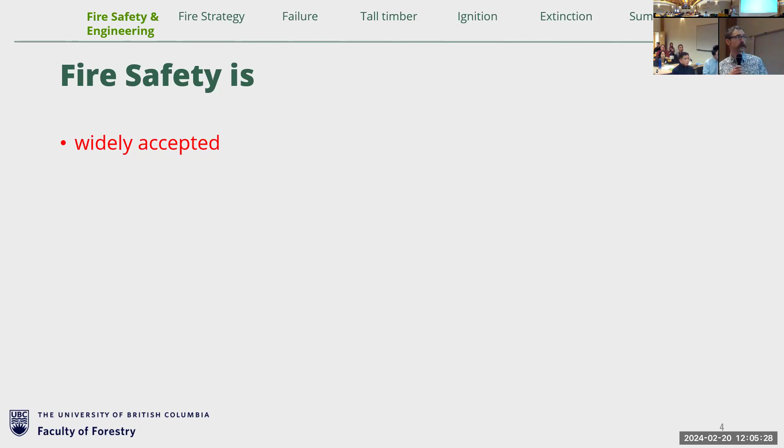And yet fire safety has been part of a major conspiracy theory. I'm sure you've heard about this when you think about 9/11 and the collapse of the World Trade Centers. There was this conspiracy theory that jet fuel can't melt steel beams. The theory was based on the fact that the flame temperature of kerosene is about 1,000 degrees Celsius, and the melting temperature of steel is higher than that. So the argument was that the fires from the fuel in the planes could not have burned hot enough to melt the structure. And yet we saw the buildings collapse.

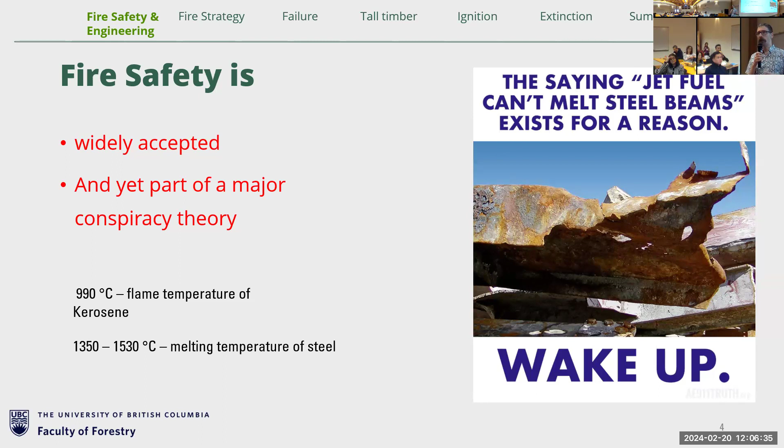That was a popular theory in the noughties. But I actually found this post on Facebook from just 2 years ago, so it's still going around. It's persistent. Hopefully I don't have to tell you it's nonsense - we'll get into why that is later. But it shows that while fire safety is widely accepted, it's not widely understood and often misinterpreted in how it actually works.

And fire safety can be restrictive. This is a replica of the City of London from 1666.

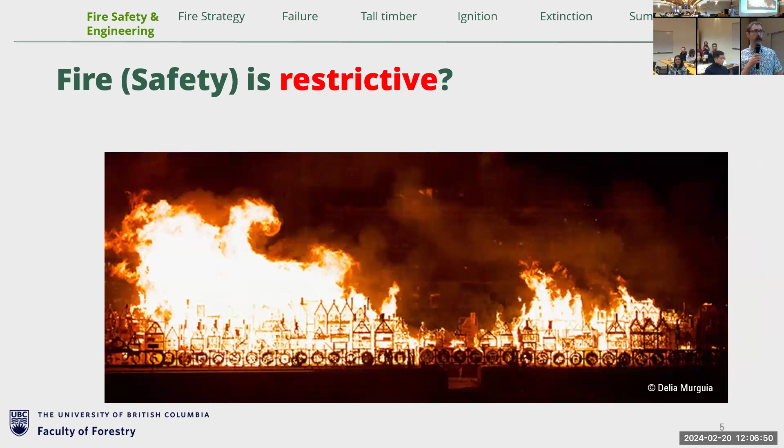And for the 350th anniversary, they rebuilt that and burnt it on a ship in the Thames. Basically, the consequence of that fire was that by royal proclamation of Charles II, you couldn't build with timber anymore. So fire safety restricted the materials we could use.

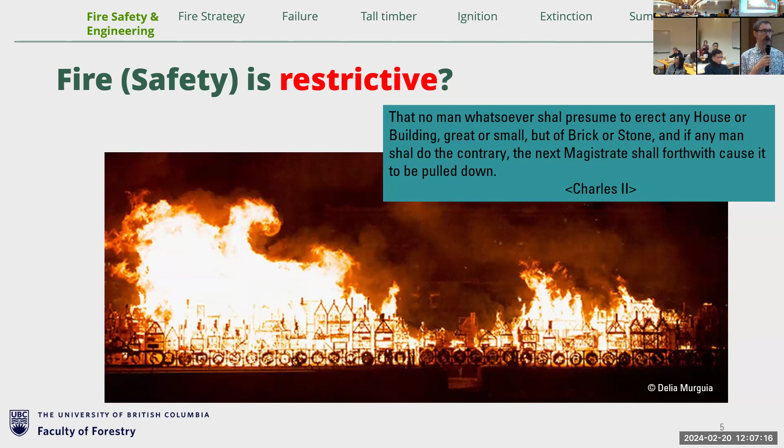Obviously, with fire safety engineering, we have moved a bit away from that. But fire safety is often seen as restrictive if you want to build something, if you introduce novel technology into buildings. And because it's restrictive, it's tightly regulated, or because it's tightly regulated, it's restrictive.

But often these regulations are not well quantified. And the reason is we don't see a lot of catastrophic fires. And because fires are relatively rare events, that means often flaws in fire safety make it into the building stock and are not discovered until a fire actually breaks out.

And actually what that means is, it can be quite frustrating that fire safety is restrictive because I work with a lot of amazing colleagues in wood science. For example, we have guys working with cellulose and lignin, taking wood and making amazing new products out of it. And with fire safety, sometimes it feels that 50% of my job is telling architects what they cannot do. They have great ideas, but sorry, fire safety won't allow that.

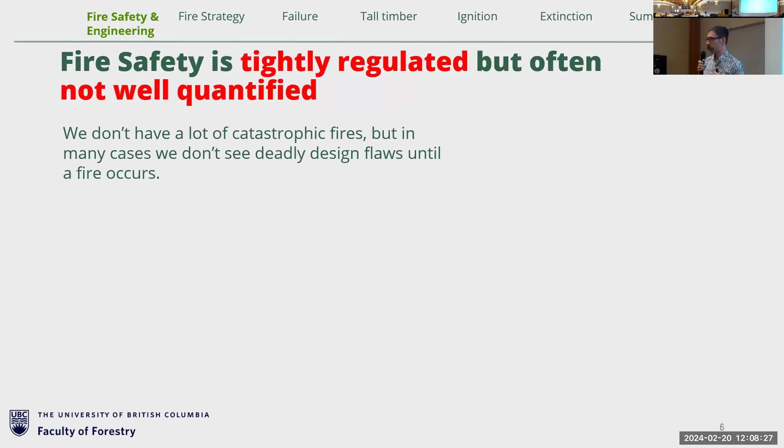The other thing that means, because it's not well quantified, is I can always say in grant applications: well, maybe there's something that you haven't considered. You need to pay me research money so that I can find out what you haven't discovered.

Actually, Kathleen Almand from the Fire Protection Research Foundation, who also worked at NIST, kind of summed it up when she said that we do have rare structural fire failures, but when they do happen, usually it's something that could not have been foreseen in standard fire testing.

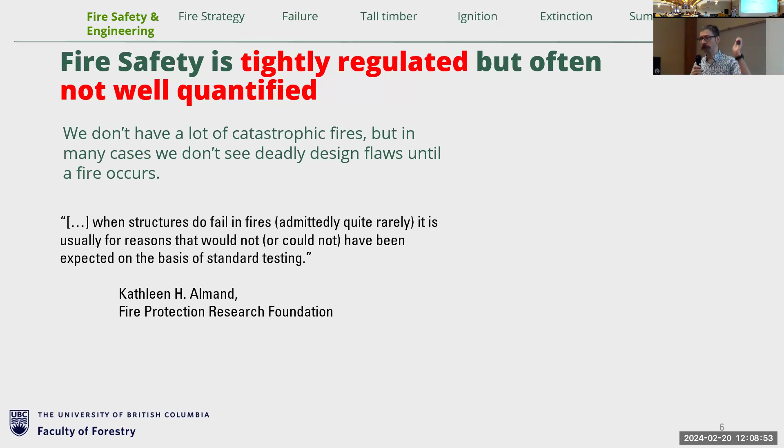And again, I can say that the need for research is there because look at this nice new timber building, would be a shame if something happens to it. Almost like a shakedown. On the other hand, I can always argue that if you don't have a fire event, maybe you're spending too much money on fire safety. So really the key here is to move towards better quantified fire safety. That's one of the things driving research.

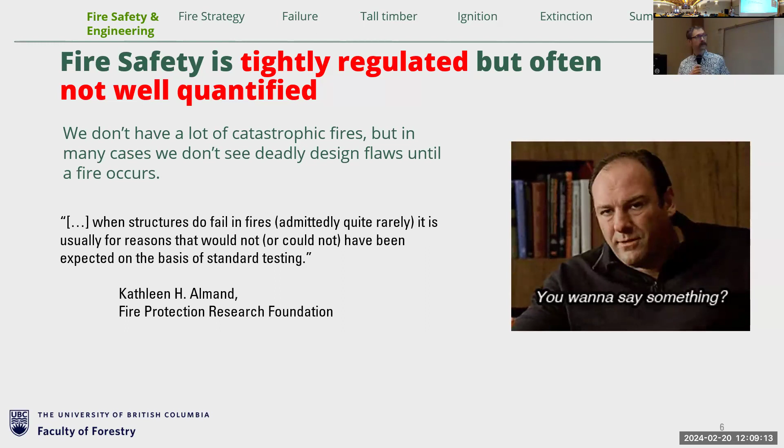At the same time, we said fire safety is restricting, but fire safety engineering can actually be quite enabling. I hope most of you know this building.

It's the Centre Pompidou in Paris. And this would not have been possible without fire safety engineering, because it sits right down in the center of Paris. At the time, the fire resistance rating required for a structure such as this would have been 4 hours. One of the architectural features of this building is that all the structure is located on the outside, visible to the observer. So it's not hidden, it's shown, but you would not be able to put it there with a 4 hour fire resistance requirement.

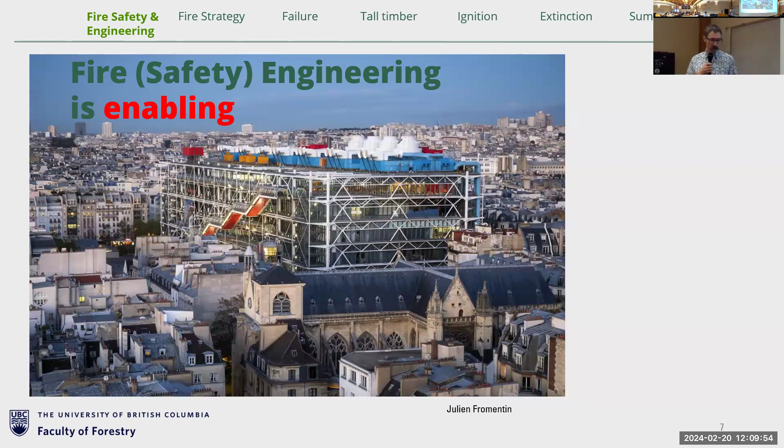Essentially what happened is that Margaret Law, who was a pioneer in fire safety research, at that point worked for Arup, went to the authorities and showed that if we actually look at what the external flame temperatures are, what the heat exposure to these external structures are, we can justify that with these fire safety features, we can build this building despite not achieving 4 hours fire resistance on these external structural elements.

So it's really about doing research. The research shown here is from the 50s, it's her early work on ignition of wood, but she was a pioneer, and she really pushed the envelope of using knowledge and engineering to justify bold architectural visions.

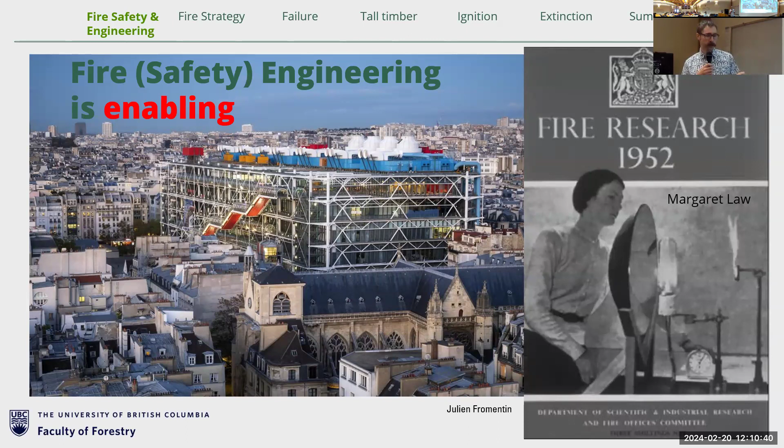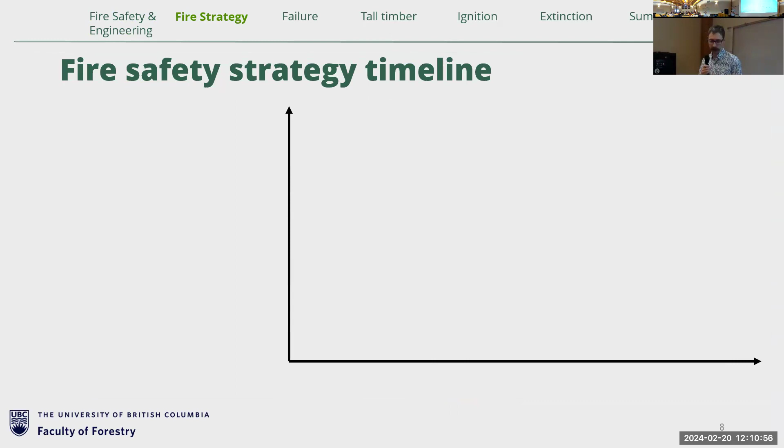And how would that work in terms of how do we apply fire engineering to a building? Well, the fire safety strategy becomes very important. If we look at a timeline, with time on the x-axis, and on the y-axis we have the fire size, the people evacuated, and the structural integrity of the building remaining, a fire might develop like this: initial phase, then rapid growth and more growth, and eventually getting to 100%, or in this graph, even beyond.

Fire safety features could include sprinklers. The first sprinkler can control the fire, giving us a smaller fire to deal with. If that sprinkler doesn't work, maybe the second sprinkler will. If the sprinklers don't work, we have the fire brigade. So all of these create different fire scenarios that we can evaluate.

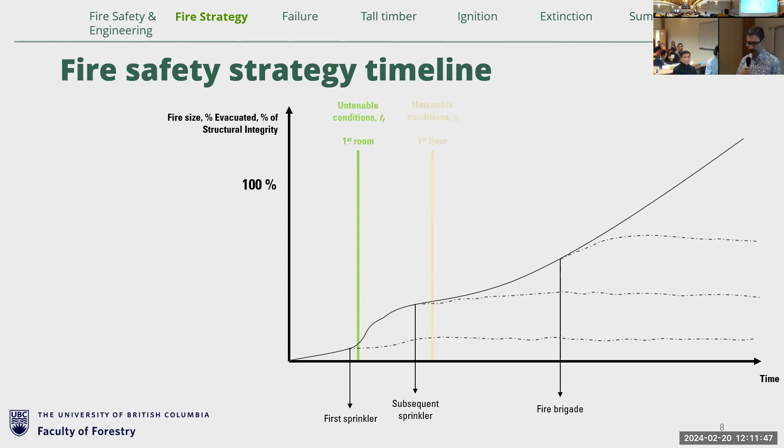Ultimately, when we think about life safety, as the fire develops we'll get untenable conditions in the first room, then untenable conditions on the first floor, and eventually untenable conditions in the whole building, if we don't manage to stop the fire before that.

We need to detect the fire and raise the alarm, giving people the opportunity to escape. First, the people in the first room need to escape before conditions there become untenable. The same principle applies to the floor and ultimately the whole building. If we satisfy all that, everyone gets out safely. And during that escape, we need to maintain the structural integrity of the building.

Eventually, if the fire keeps growing, we may see local collapse and then collapse of the whole building. There are different interpretations. Most building codes and laws say structural collapse can be tolerated as long as everyone gets out and there are no firefighters in the building. But in reality, if you think about a high-rise in the center of Vancouver, you don't really want that building to collapse originating from a fire that started in a toaster somewhere.

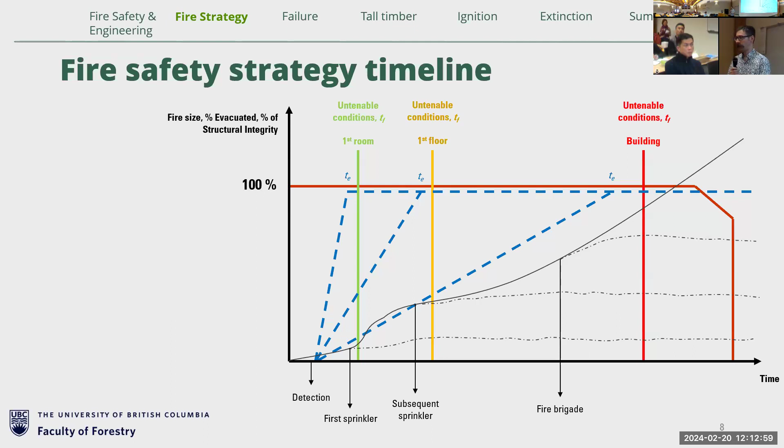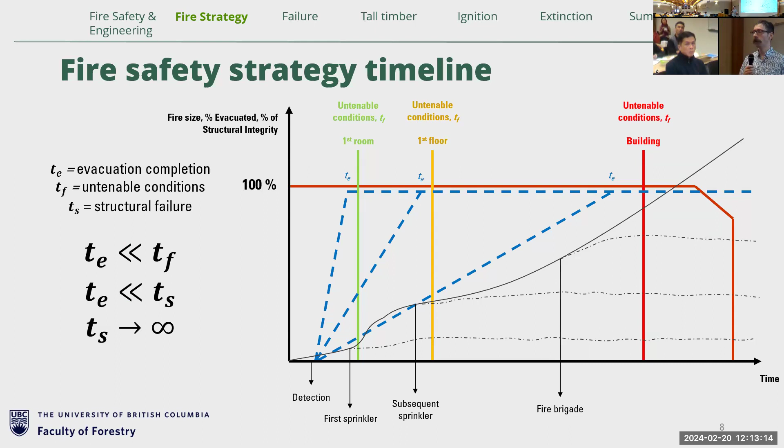It's a disproportionate collapse. So really what we want is our evacuation time to be smaller than the time to reach untenable conditions, and smaller than the time to structural failure. Ideally, we want structural failure to happen never—time to infinity.

I mentioned sprinklers there. Sprinklers are great from a fire safety engineering perspective—statistically they've helped reduce death, injury and damage in a lot of fires. But if sprinklers worked 100% of the time, Stavros should dig out my contract and rip it apart, because then you wouldn't need me—you wouldn't need any fire safety engineering if you could rely on sprinklers 100%. But they don't. They have a failure rate, depending on who you ask, somewhere between 90 and 95% reliability, which is still pretty good, but ideally you cannot rely on it alone.

Sadly, that was shown just a few years ago, and two weeks ago they released a coroner report. There was a fire in an SRO in Vancouver, the sprinklers didn't work, and two of the occupants died. So fire safety relies on sprinklers and a lot of other things: detection, fire resistance, compartmentation, having adequate egress paths—all of these combined, and all of them have a failure rate.

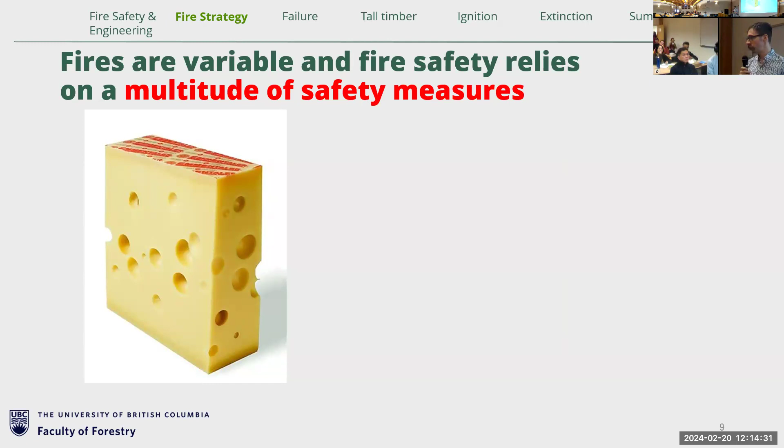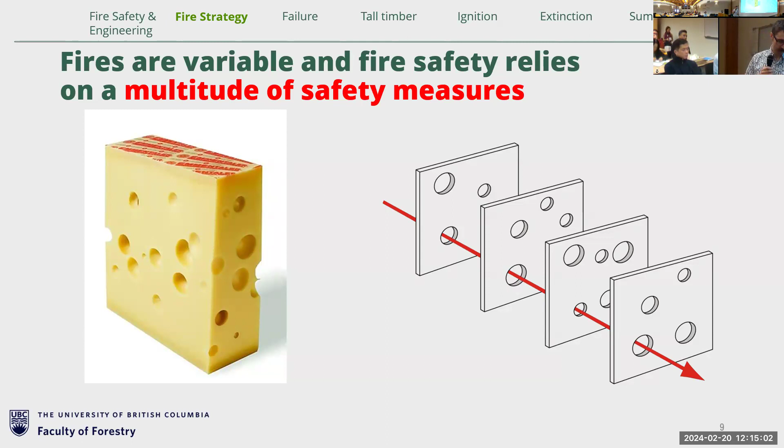The idea then is to apply the Swiss cheese model, which you may have seen during COVID. All of our systems have a point of failure, a probability of failure, but if we make those holes small enough, and layer the cheese so the holes don't align, then overall we get a probability of failure that's acceptable. So the idea is my first line of defense is maybe just the sprinklers—if they fail, all the other systems take care of it. That's the idea, and we'll see why that doesn't always work great.

So how would we look at that from a building point of view, talking about fire safety engineering? If we look at a room like this, a likely ignition source would be the AV equipment here. If the fire starts, hopefully at some point people will realize this isn't just a stupid trick by the guy talking about fire. We have three doors here—I'm only using two in the simulation. Eventually the guy at the front is a bit slow, but everyone gets out, and we can see the smoke descending.

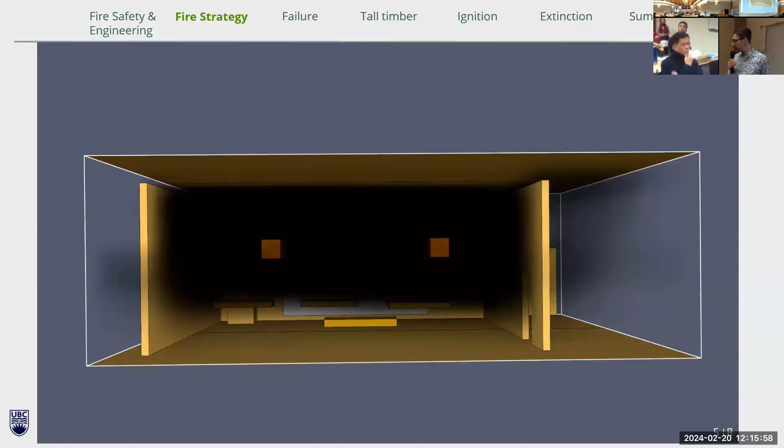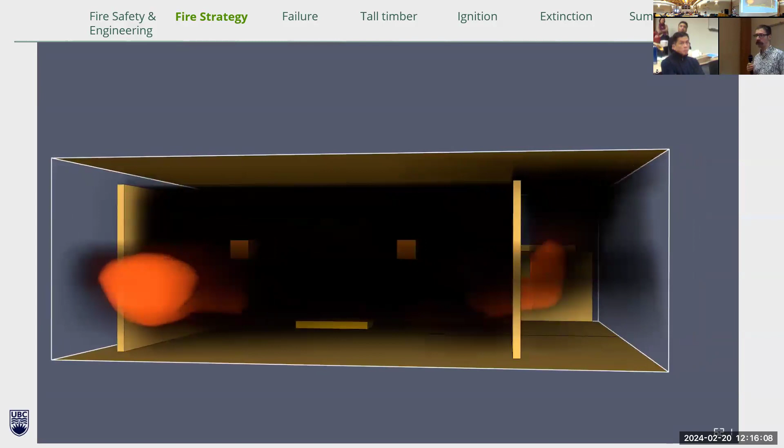In this case, no one was really affected by smoke, so everyone got out before conditions became untenable. If we wait a bit—I did try to simulate the ceiling as well, made of timber—eventually we'll see that timber ceiling ignite. That's happening now, and that means we now have flashover, so everything in this room is burning, and flame can spread outside and through the building.

I made this video to have some nice pictures to show. I didn't want to go too detailed because it can take quite a while.

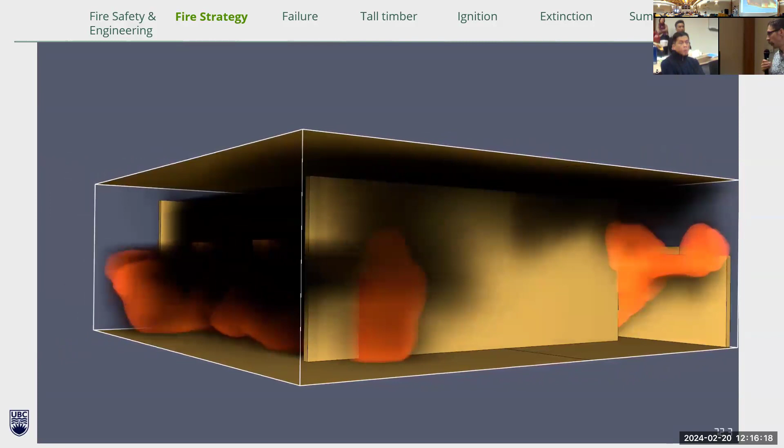But ideally, at this point, we're all in the escape stairs or already outside on the fresh air. Fire service will come in if the sprinklers haven't dealt with it.

This program is FDS, developed by NIST in the US. It's widely used in the fire safety industry, and it looks good because it presents nice pictures. You can put layers on there to show temperature, calculate your fractional effective dose, and basically make sure you separate tenants from smoke and toxicity.

The problem is that I'm not an FDS expert. I managed to run the model, but there are so many inputs you can tweak that you can always get the result you want. Or if you put in the wrong inputs, you may get a result that's very far from reality. So there's a danger that these tools look very convincing, and I'm sure you looked at that and said, yeah, that makes sense. But it's really about understanding the fundamentals behind it.

In this case, for example, it would be the ignition of the timber ceiling. I tweaked the parameters, so I did actually get ignition because I wanted to show that. But when that will happen is a more difficult question. I have enough experience that I could look at the underlying parameters and outputs of this model and see whether it's actually wrong or right, or how wrong I am, maybe.

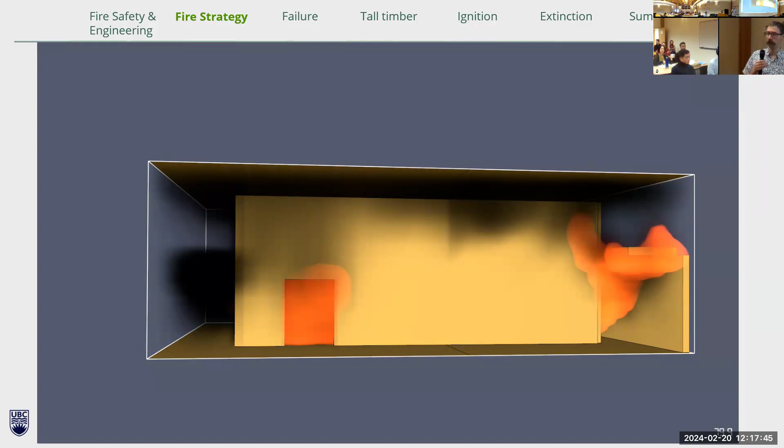But the problem is that a lot of times these tools, because they work as a black box, can be abused. This had nothing to do with FDS, slightly different topic, but we do get failure on fire safety engineering, and it's important that we learn from failure.

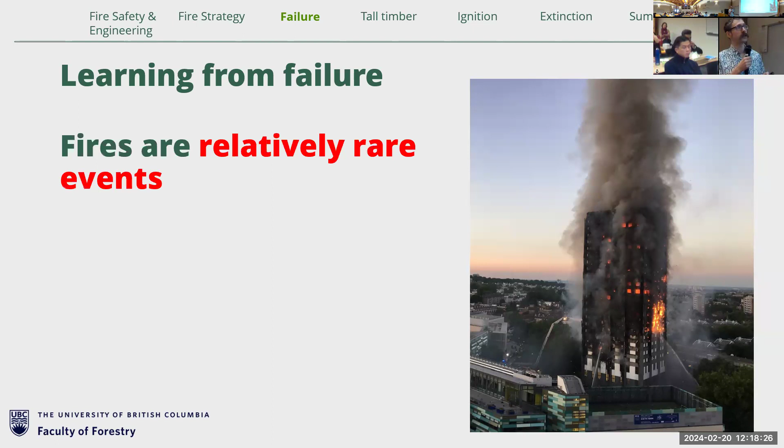This is Grenfell Tower in London, in which 72 people died in 2017 — 73 if you count someone who died a few months later, but the official death count was 72. It's important that we consider what happened in this case, so that we can apply that knowledge and see where fire safety engineering went wrong, what led to this situation.

The first thing that's striking is that I said fires are relatively rare events, but that's only true for individual buildings. If you have a city with a million buildings, then the likelihood that any of those buildings will ignite on any given day gets closer to 1.

This is illustrated here too, because in Grenfell Tower, it's not 100% determined, but the most likely ignition source was the fridge freezer on the 4th floor in flat 16. And for the London Fire Brigade, that's an everyday event.

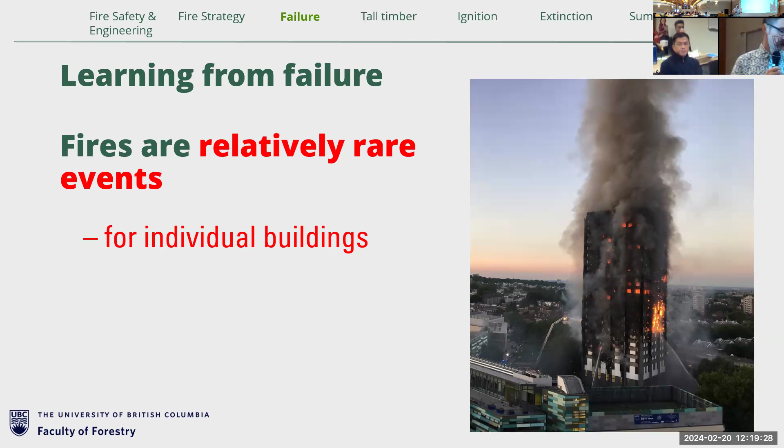In the UK, we assume there are about 2,000 white goods fires per year. If you extrapolate that to the population of London, statistically it's literally an everyday occurrence for the London Fire Brigade. They went there and the fire started very normally — they were calm, it seemed like an everyday situation. But then ultimately a lot of things in the fire safety strategy went wrong.

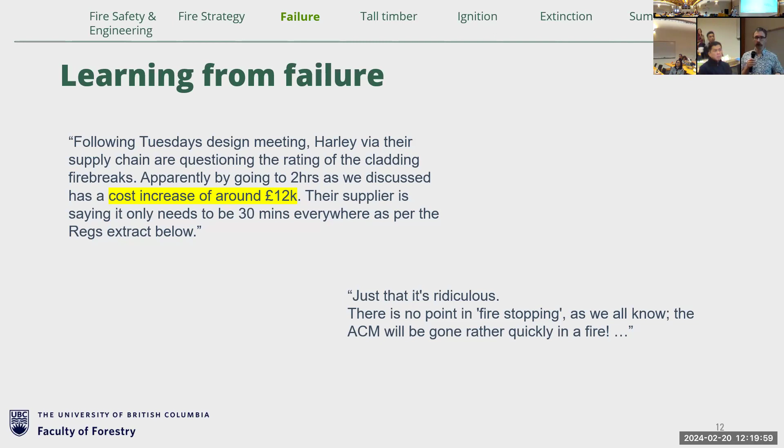First of all, the building was renovated in 2016, and that meant the cladding was combustible. These are just some excerpts from the inquiry that show some of the thinking of the people behind it. I could spend hours talking about all the different things that went wrong — there were a lot of players in that renovation who did not act to a professional standard. But overall, it was the whole fire strategy that failed.

In this building, people relied on that cheese theory — not explicitly, but basically everyone who was slightly slacking in their duties to ensure fire safety relied on all the other systems working. The problem with this cheese theory is that it doesn't assume those layers are dependent on each other. As soon as you have vertical fire spread on the facade, you need to rethink your strategy, and you're damaging the whole idea that everyone can get out.

One of the things that made this fire deadly was that it only had one staircase. The assumption was that it could work with a stay-put strategy, where people on the upper floors in their flats stay put, and only people directly affected by the fire move out.

There was a lot of criticism for the fire brigade, because they actively told people to stay in your flats, and then in the end, those people perished in the fire. So you can see that was a very difficult decision for the fire brigade, because at some point they had to see, okay, our strategy of containing the fire to certain parts of the building has failed. But now what do we do? Because if we now change strategy, we're sending people into a smoke-logged stairway. So a very difficult decision.

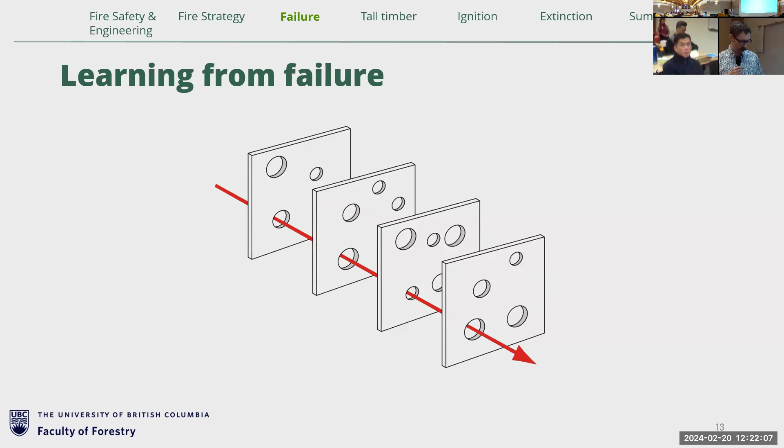Grenfell Tower was obviously a very significant event from a fire safety point of view, center of London, a lot of people dying. This was a few years ago, an apartment fire in the Bronx. The investigation is from 2022, but the fire was, I think, a year earlier. 17 people died, and in this case, actually, the people that died were the ones trying to get out, and died in the escape stair, while a lot of people that stayed in their flats survived. So complete different fates based on the fire strategy and the escape strategy.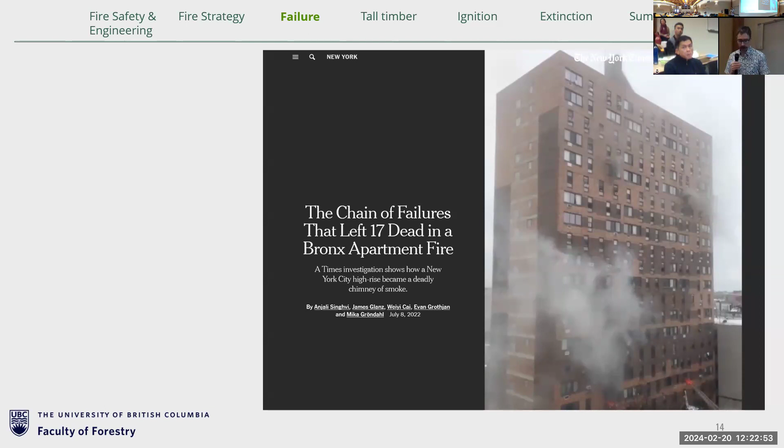Neither this building nor Grenfell Tower were made of wood. So why am I talking about this? But they had one thing in common, and that was they were mainly inhabited by people from the lower economic spectrum. Grenfell Tower had a lot of recent immigrants or people from a lower income bracket, and it was the same here. Unfortunately, it's true that fire safety is not equally applied across society.

This is kind of important as we build more timber buildings. At the moment, those timber buildings are marketed as higher end accommodation. But these buildings are 30 to 50 years old, and they go through renovation, they go through changes in occupancy and ownership. So buildings are also evolving, and so must our consideration of the fire safety strategy. We need to think now, how are we constructing our buildings? Will fire safety still be valid when we change occupants, when we change even the occupancy, if we, for example, convert an office building to housing?

You can look through a lot of fire safety issues from the last 2 years, and usually it disproportionately affects people from lower economic brackets. There was a fire just last year in South Africa, in Johannesburg, and I think 53 people died. It didn't receive a lot of coverage, mainly because people said, well, it was an informal settlement within the building, which is actually quite common in South Africa and Johannesburg. So the blame was kind of shifted onto the tenants.

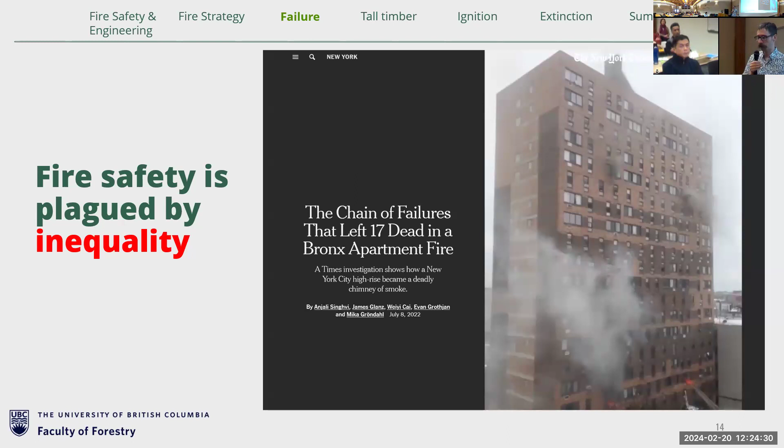So it's a bit of an awkward move to timber, but all of these buildings had one thing in common: they were tall buildings. Statistically, if you look at the BC fire statistics, we have more fire deaths actually in single family homes than in tall buildings, but the consequence of a fire in a tall building can be worse. It's also related to the fact that we have relatively low density. So if you look across BC, more people actually live in single family homes or low rises than in high rises.

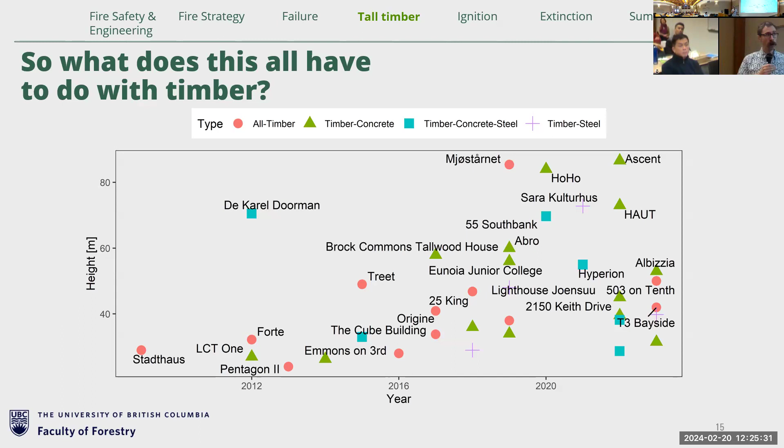But with timber, what we see is that we have the Brock Commons right there, which at one point was the tallest timber building in the world. And it has since then been exceeded in height by multiple buildings. So now it's just somewhere in the middle. We're building more with timber, we're building taller with timber. This is from Professor Jose Torero, from the phase 2 expert report from the inquiry after Grenfell Tower. He pointed out that we implement technology like timber because it's driven by the climate crisis, but fire safety is obviously not the purpose for which we implement timber.

It's not an afterthought. People are thinking long and hard about building these taller timber buildings from a fire safety perspective, but fire safety is challenged by new technology, in this case, building taller with timber.

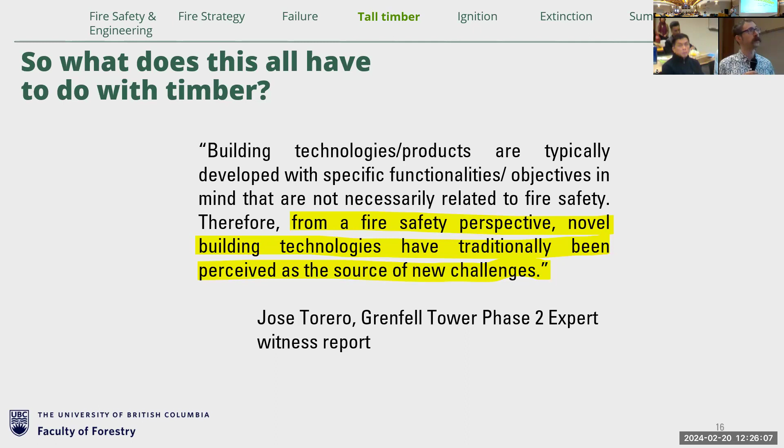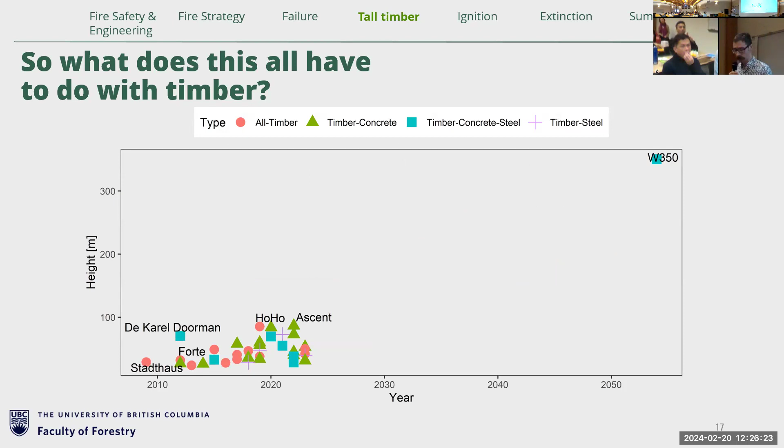If we look at this graph and look a bit into the future, the W350, that's a building that has been announced for Tokyo, 350 because they anticipate it will be 350 meters tall. So there's certainly room to grow for timber buildings. This is what it's supposedly going to look like, though we don't know yet. This is planned for the 2050s, so plenty of time to do research and hopefully get things right. But if we look at the trajectory of those buildings, we may be getting there much earlier.

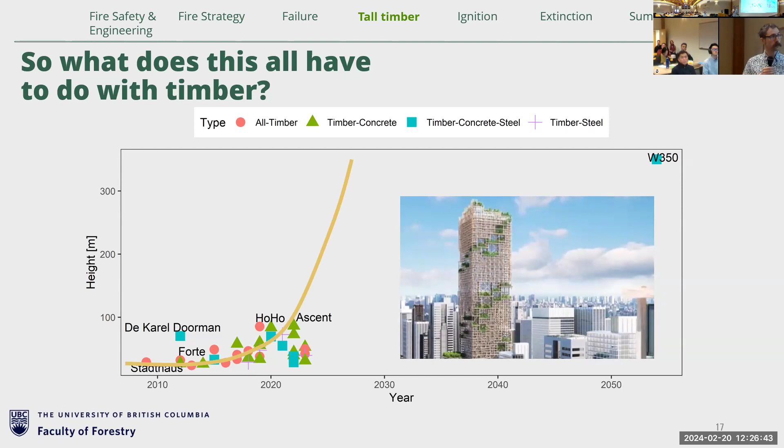So what's the issue with building tall timber? You may recognize this—this was announced for Vancouver. I'm not sure if they're still planning to build this, but often these things are justified by quotes like this one, I've removed whoever said it: 'The structure would be predominantly made out of fire-resistant wood, specifically cross-laminated timber. It's not going to burn.'

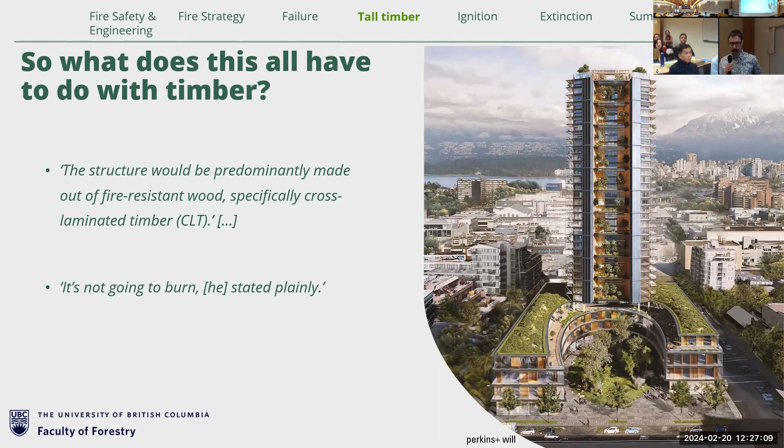And this was recently in the Washington Post: 'In case of fire at a wooden high-rise, damage would be contained by the requisite sprinkler systems and the fire retardant coatings on the timber. Advocates say that in the event of a catastrophic fire, the thick beams would slowly char rather than combust, and that even then the timber would burn at a steady, measurable rate. Unlike steel, which melts and suddenly folds, new timber towers have all achieved the highest safety ratings.'

So if we have this, then again, why did the faculty and the department hire me? What's the need for me and my salary here?

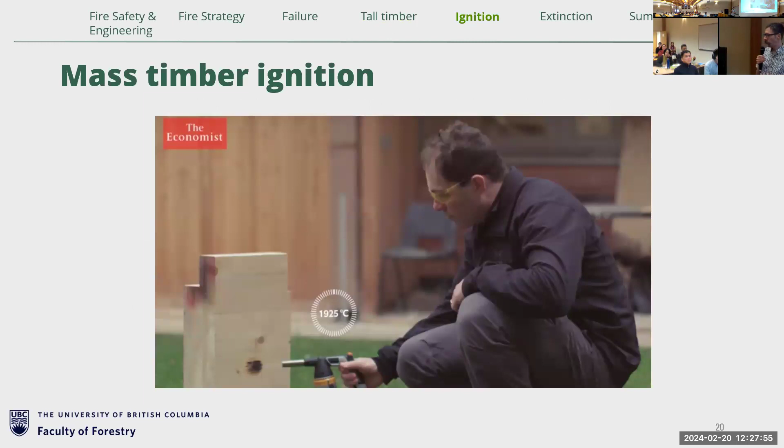Well, let's start from ignition, which is where fires start. We often see this kind of picture used to justify timber.

We have this torch, which according to the picture is very hot, almost 2000 degrees Celsius, applied to timber, and we just see charring and no burning. The problem is that's not a fire—that's just a demonstration. It shows the charring effect, but the temperature doesn't matter so much here. You can barely see the flame, so it's a very lean flame, meaning the emissivity is very low, so there's very little radiation coming from that flame. It has momentum, so as it impinges on the timber, there's a lot of heat loss into the timber and to all sides. At the same time, the Damköhler number is really low—that's the ratio of the chemical reaction rate to the mass transfer rate. It means that because it impinges, there isn't enough time for all the combustibles created to react.

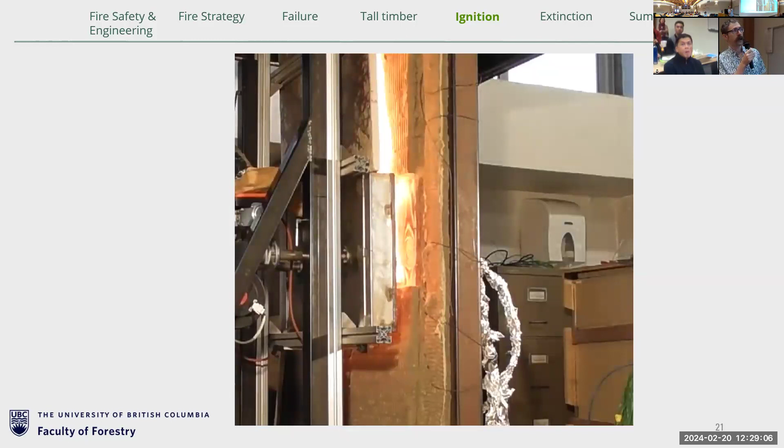If we compare that to a real fire exposure, we can look at this experiment I did as part of my PhD. We have a piece of timber exposed here to 50 kilowatts per meter squared, and you can see it ignites after 5 seconds—I'm not applying any additional torches, that's auto-ignition, just that heat flux. We'll see later how 50 kilowatts per meter squared relates to a building fire we may consider.

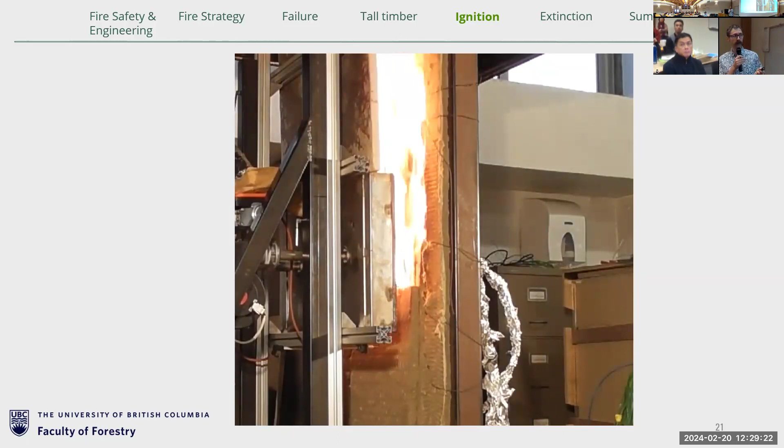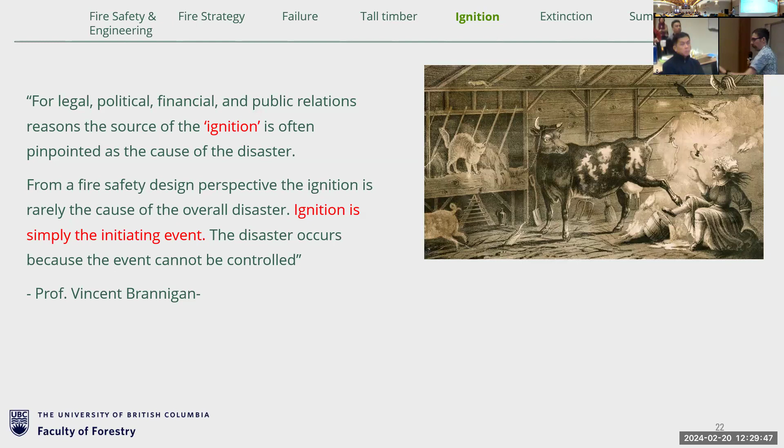Ignition is a good way to start, but it's kind of misleading because ignition is only the initiating event. If you concentrate on the ability of mass timber to resist ignition, you're looking at the wrong thing, because what's going to start igniting in a fire is not going to be the timber ceiling, but electronics—maybe someone's phone is faulty. The picture on top is Daisy the cow, who allegedly started the Great Fire of Chicago. But ignition risk is always there. We take measures to minimize it by having our electronics tested, or telling our kids not to play with matches, but in the end it's always there. Something happens—for example, we saw with the Grenfell Tower fire, it could just be a fridge freezer or the dryer you use every day.

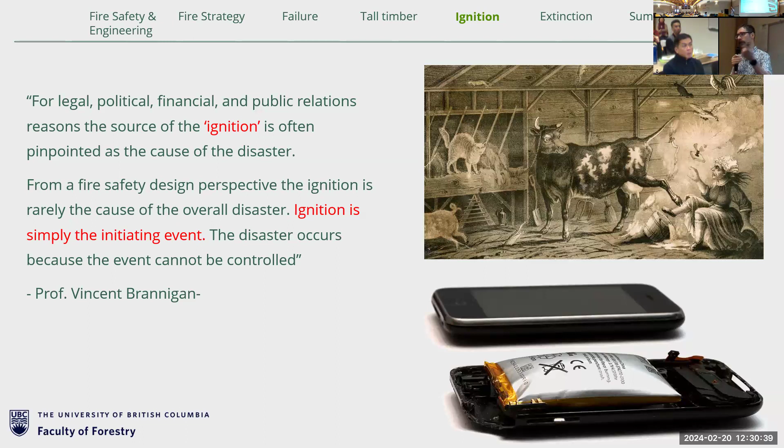So it will happen, but blaming it on ignition is not a good fire safety strategy. You need to account for ignition, and then your building needs to be able to deal with the consequences of ignition. And what's more important for timber is actually when it burns, that it goes out.

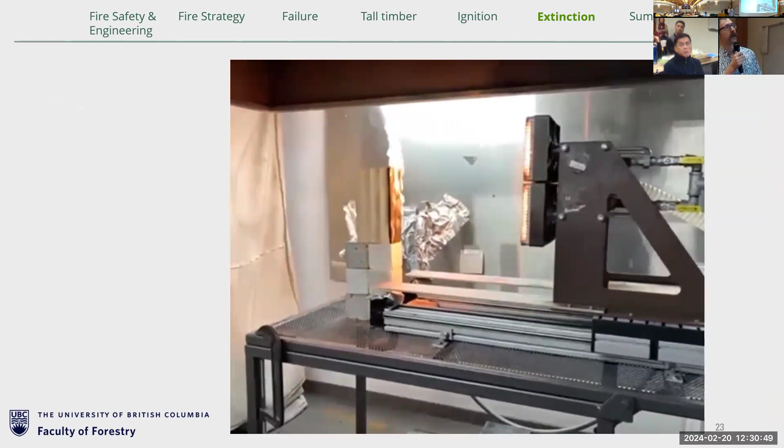Here we have a piece of timber, and it was burning with around 50 kilowatts per meter squared. You can see as we move that heat flux away, the timber self-extinguishes.

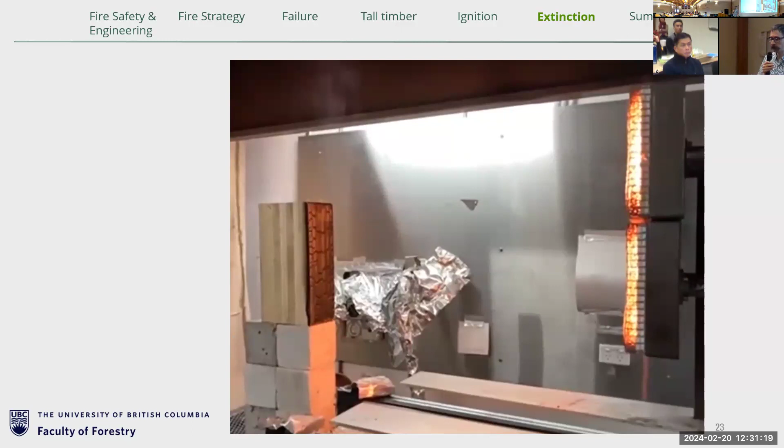That's the idea of having exposed timber like that, that eventually, if we have a fire in this room, the chairs will burn, the tables will burn, anything that can burn will burn. But as that burns out, eventually the timber forms a char layer, and when the external heat flux is removed from the timber, it should self-extinguish.

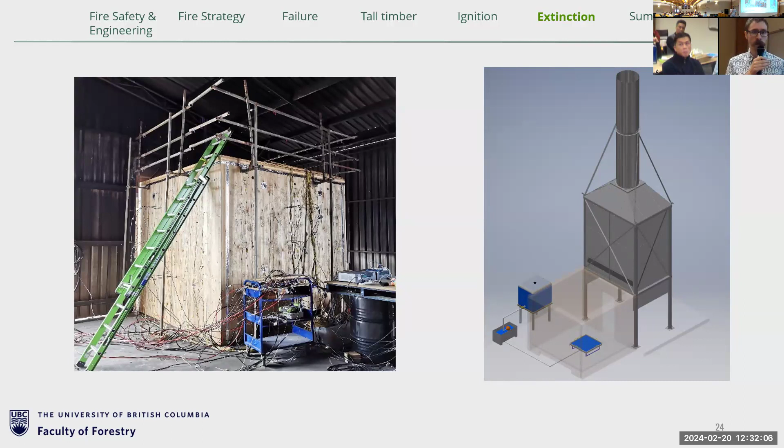So it's basically an inverted toilet system, like a cistern that keeps feeding kerosene into that tank until we turn it off. And on the external face of this warehouse, we have a buoyant calorimeter. Basically we're running the smoke through here, measuring temperature and gas concentration to, in the end, measure the heat release rate of the fire.

This is how it looks on the inside, and this is kind of our kerosene system that keeps feeding kerosene into that tray, so we can guarantee a constant burning rate until we turn off that fuel externally, and this way we can control the fire duration.

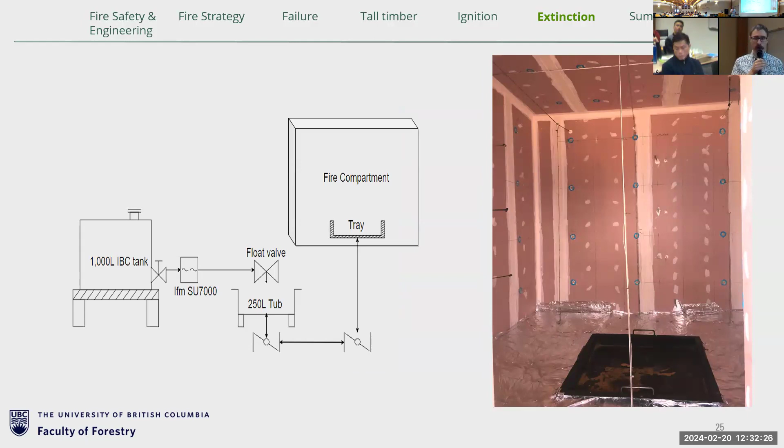This is what it looks like. In this case, all the timber is encapsulated with plasterboard, and we ignite the kerosene, and it starts to burn, and you can see the smoke filling the room like we just saw in the simulation. Eventually, now the video is sped up, but eventually we kind of cause flashover, meaning all the combustibles in the room are burning. You can see combustion happening everywhere in the gas phase.

And externally of the compartment. We let that run for a while, and eventually we turn off our fuel supply, which should happen any moment now.

We have the whole compartment full of instrumentation. All the wires you see hanging around are thermocouples. We have thin skin calorimeters on the walls. We have pressure probes here.

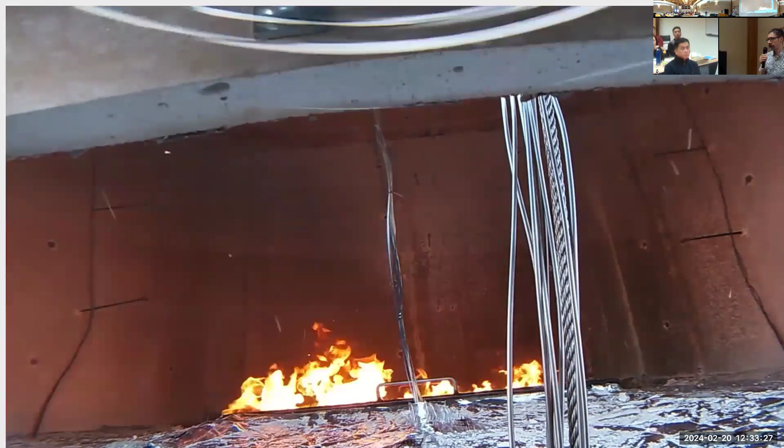And as the fuel of the kerosene burns out, the fire goes out. We don't have to put any water on it. It's burnout, and the compartment boundaries still look good.

So that's the ideal case of design. The fire service doesn't even have to intervene while the fire is ongoing, or if they're busy with other things, or if they cannot intervene because the fire is very high up, it makes their job much easier and is a layer of protection. So compartmentation, kind of boxing the fire in, forcing it to burn out.

These are the measurements that we took of the heat release rate. So we ran one where we just turned the fuel off after about 7 minutes, and you can see the burnout heat release rate goes down. We ran one that we ran for longer, where we kept the kerosene just going.

And then eventually what happens is you can see here an increase in heat release rate, which is due to the encapsulation failing. So if the encapsulation fails, we suddenly have a very different fire. We can see that the internal fuel load doesn't change throughout that time, but externally, because the timber starts to become involved, we're getting higher heat release rate.

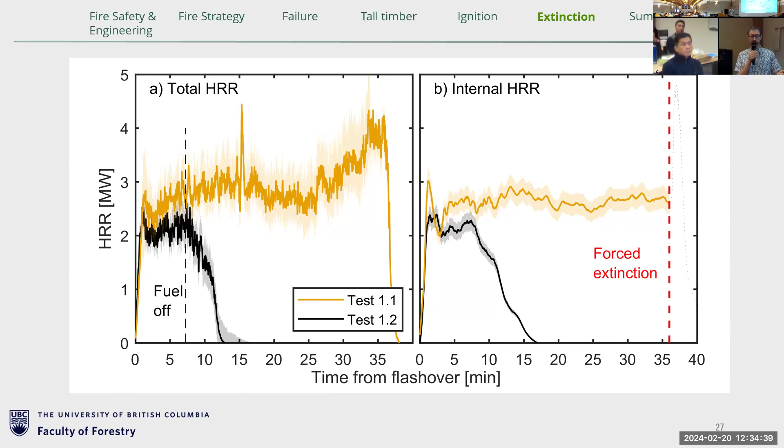Having demonstrated that we can get burnout from the kerosene fire, we wanted to see, okay, what if we actually expose some timber? Because we don't want to hide all the timber. It looks good. It's cheaper to not hide it all, because plasterboard costs money and labor to implement.

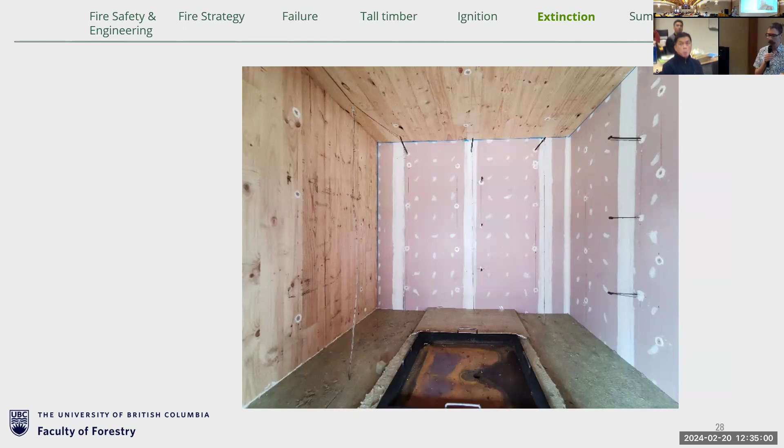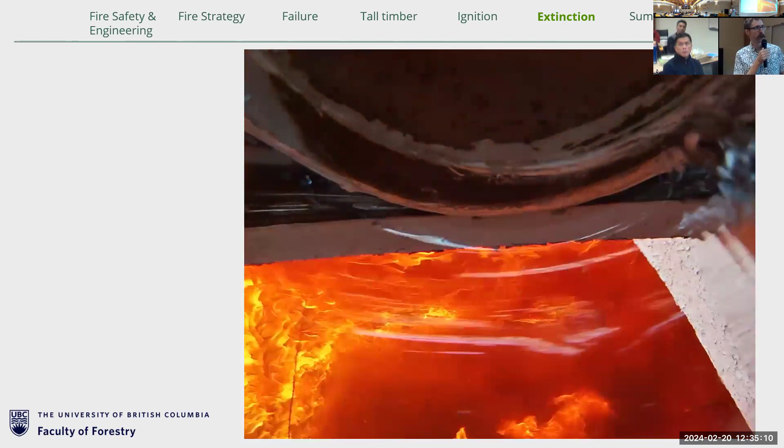So we start with having 2 surfaces exposed. This is kind of towards the end of the fire. You'll see the camera's a bit of an awkward angle. You'll see the fuel kind of slowly burning out at the center here. That's the kerosene, but I want you to pay attention also to that wall that's exposed on the left-hand side. So that's timber burning, but you can see that...

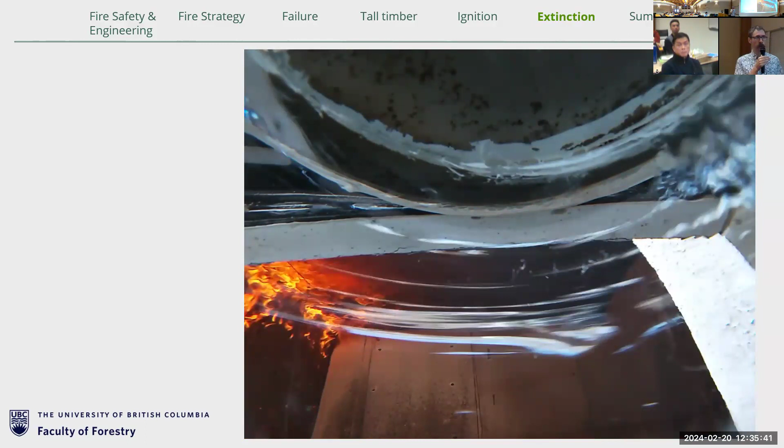Slowly it's less burning. That's the timber self-extinguishing, similar to what we saw earlier. We remove the heat flux, the timber self-extinguishes, and you can see it keeps burning here where the ceiling and the wall meet, because at their intersection is where you have the highest feedback between them. But ultimately, there's not enough energy to keep the fire going, and we get self-extinction.

So our next question is, okay, what if we add an extra wall in there? So now we have the ceiling and 2 walls exposed.

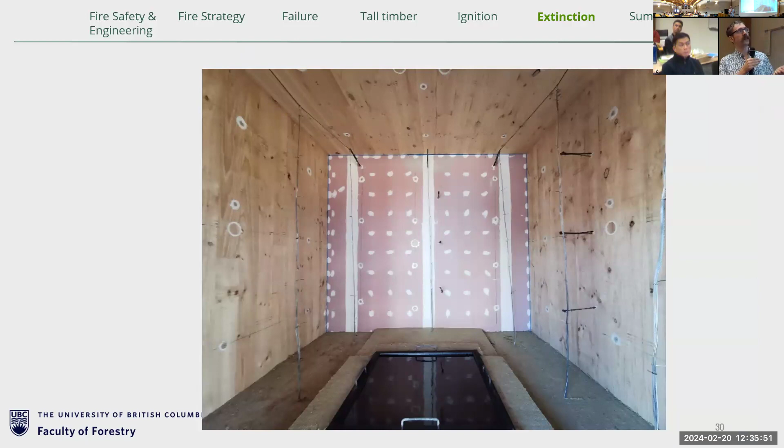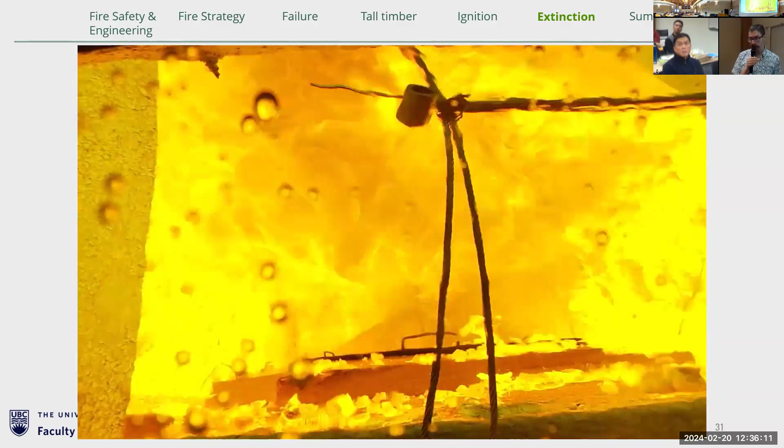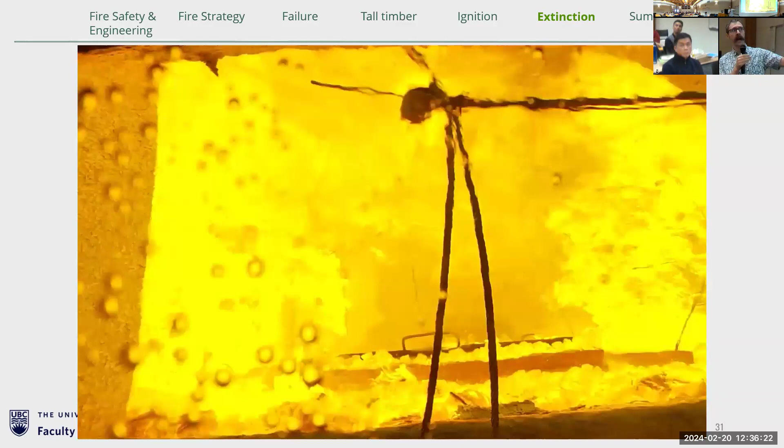This is kind of towards the end of that fire, seen through the camera or GoPro suspended in water just at the entry. You can see the timber walls and ceiling keep burning, and now we see char fall off. That char fall off means we won't get self-extinction because we keep exposing new timber. Also, we're forming a smoldering layer on the bottom that adds additional heat. So eventually in this scenario, we have to add water and extinguish the fire like that.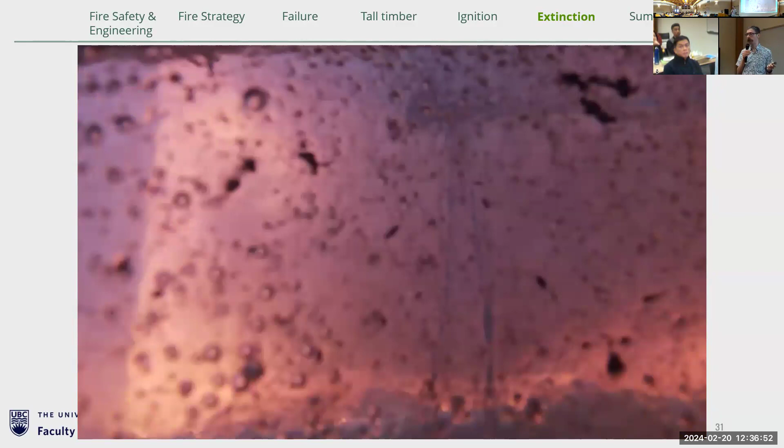So we're relying on the fire service. And the problem with that is if the fire keeps burning and the fire service cannot intervene, then all the fire resistance I can assign to that timber doesn't matter, because I'm basically creating an infinite fire until I burn through. And then I'm in the next compartment, and then maybe on the next floor. So that's a failure of the fire safety strategy right there if I cannot guarantee self-extinction.

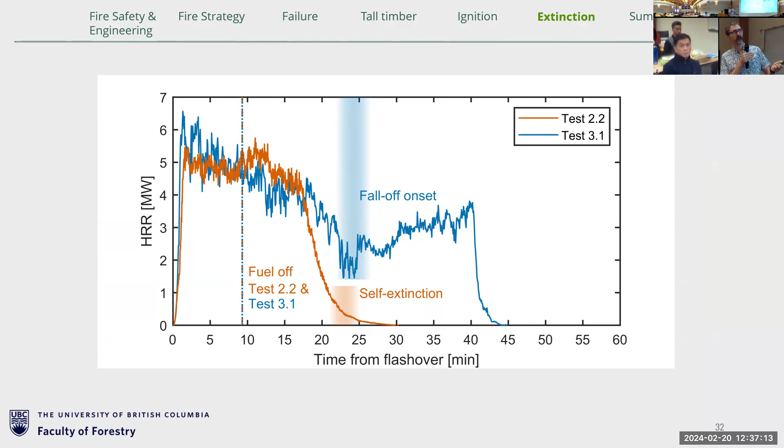And this is what it looks like in terms of heat release. We can say that those 3 layers, we're kind of getting close. We can see the orange one gives us self-extinction - that's the one we saw in the video. But for the blue one, it just doesn't reduce low enough. And eventually we get this steady state and we get the fall off, which then increases it again. We can see that steady state as well.

If we look into the actual timber, we have thermocouples in the solid phase of the timber, and from those we can get the thermal gradient. By multiplying the thermal gradient with the conductivity of the timber, we can back calculate the heat flux from the char to the pyrolyzing timber. And again, we see for the one that self-extinguished, we kind of see a constant reduction. We see a threshold here where we align it with the self-extinction we observed.

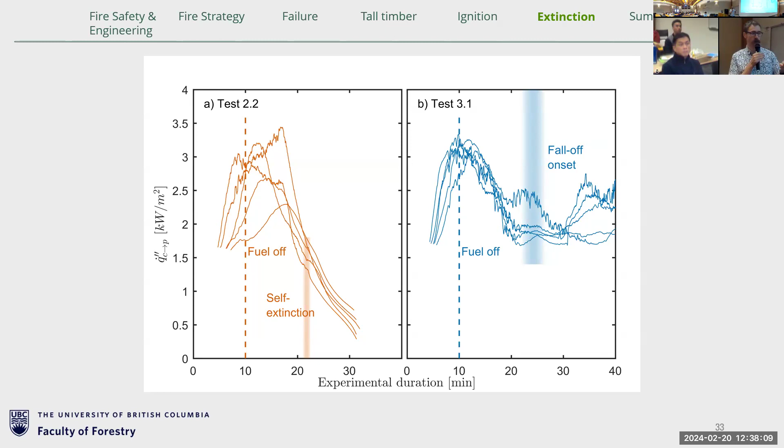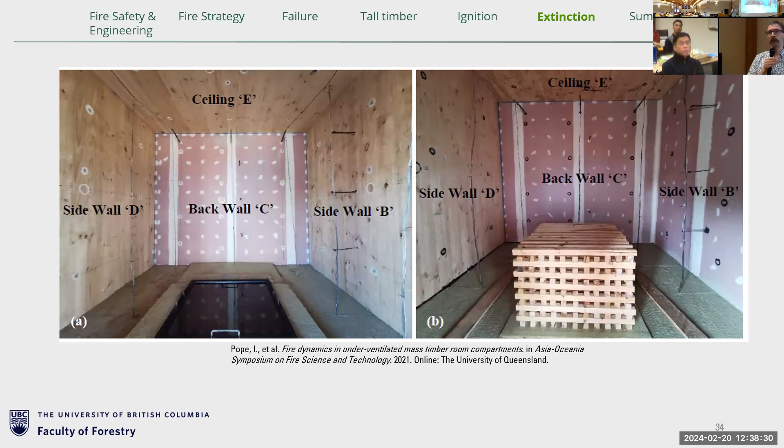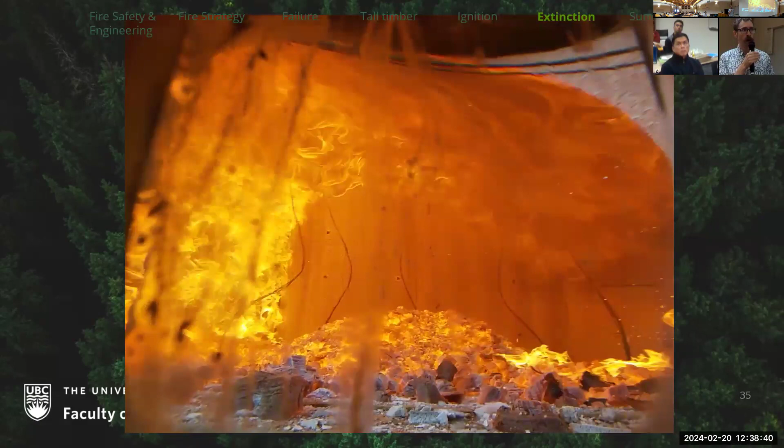But what we also wanted to test is, okay, what if we don't use kerosene, but a timber wood crib like that? And that wood crib is exactly the same fuel as we used in the one that self-extinguished. This is kind of towards the end - the wood crib has burned out and collapsed into this smoldering layer, as you'd get in a barbecue. We do start to see fall off as well. And eventually you will also see fire coming through edges in the encapsulation. So now even the encapsulated timber starts to get involved.

And the reason this doesn't work, because we saw for the kerosene we had burnout, is that it takes longer for the wood crib to burn, but also because it's a cellulosic material, it leaves that smoldering char layer on the bottom, and that smoldering char layer basically acts as another surface that keeps feeding heat to the timber and keeps it burning. And again, our fire strategy has failed.

And in reality, we don't usually have either kerosene or wood cribs in our buildings - it's kind of a mix. We have some wooden tables here, but we also have plastic chairs. So we need to understand that, okay, we have a fuel load, but also that fuel load has a burning rate, and how does that fit into our fire safety strategy? In this case, can we look at our fire safety strategy and our fuel load and see that it burns out before we get fall off, before we burn through the wall, and we get self-extinction? Basically once we expose timber, we need to guarantee that we get that self-extinction.

This is what it looks like for the wood crib. So again, we're comparing the kerosene one that self-extinguished here against the wood crib, and we can actually see that, again, we see a reduction from the wood crib, but it never gets low enough to self-extinguish.

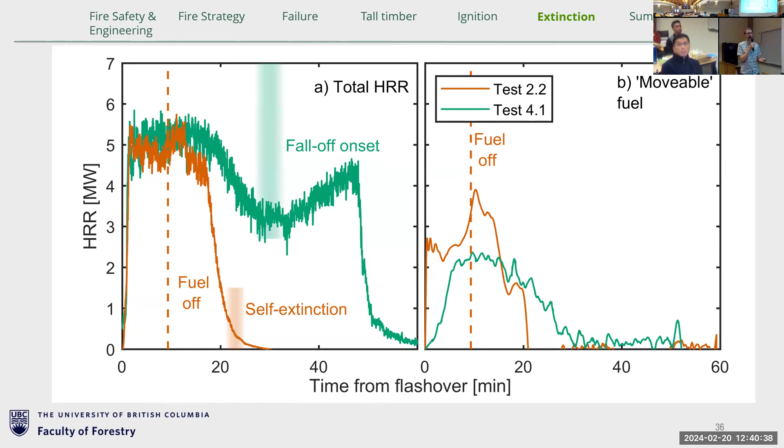And then again, the fall off drives up the heat release again. We see the difference here in the internal fuel load from the scale in the center of the compartment. The kerosene, after we turn it off, drops rapidly, while the wood crib burns longer. Even though the mass loss is now very low, the smoldering is enough, just from the radiation, to keep it burning.

So looking at all these experiments, now we're looking at the heat flux that we measure at the walls directly. Remember how I said 50 kilowatts per meter squared was needed earlier to ignite the timber? You can see we get far beyond that in a real compartment fire, so eventually your timber will ignite. We can see a clear delineation between surfaces that are exposed and surfaces that are protected, which makes sense - things that are on fire have a higher heat feedback to themselves as well.

But we do see that we can design the compartment to self-extinguish, and here there's no need to apply water. All of this is without any application of water. But we do need to be careful with how much we expose, what our fuel load is, and really what these heat fluxes are that lead to self-extinction.

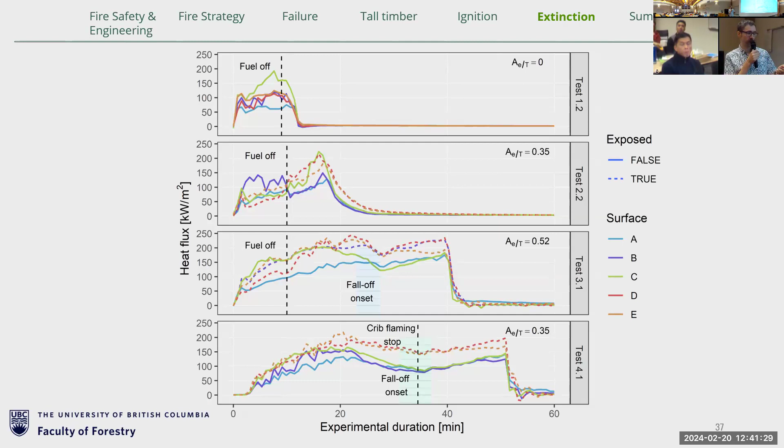Looking at the one that leads to self-extinction, if we plot the individual heat fluxes that we measured from those thin-skin calorimeters at the wall and at the ceiling - here I put 40 kilowatts per meter squared because that's what Cuevas said is kind of the minimum threshold you need to achieve if you want to have a chance of self-extinction.

And it works really well for the wall, even though over the wall it takes a longer time span to completely self-extinguish. For the ceiling, we actually have a much higher potential threshold - we see self-extinction at around 70 kilowatts per meter squared. So it doesn't only matter how much timber you expose, but also where it is. The ceiling is easier to self-extinguish because you generally have lower oxygen concentrations there and also stagnating flow.

So there's a bunch of fire dynamics issues that influence how this works. In the end, in these compartments we did have a very small opening. If you have a larger opening, you can force self-extinction earlier. But the danger is that people set up these demonstration tests with huge openings, point to it, and say, see, no problem, the timber burns but then self-extinguishes. But we cannot extrapolate that to all buildings. Of course, we can design with certain openings in mind, but we also don't know when openings will be available.

One of the big uncertainties is when, for example, glazing will fail. It really depends on your glazing system, the manufacturer, the manufacturing type. So all these things play a role.

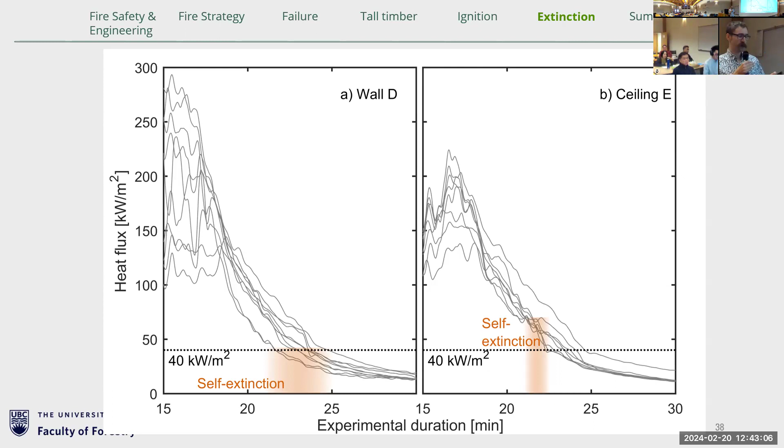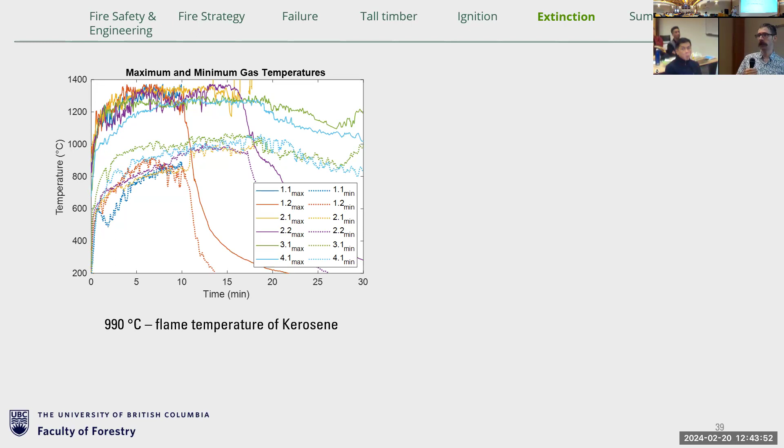But you remember how we said that 990 is the flame temperature of kerosene. So in the kerosene fires, how can we get a higher temperature? The reason is that 900-990 is the flame temperature of free burning kerosene. In a real fire, in a real building, there's feedback - you have all that smoke accumulating, feeding back onto the kerosene, really accumulating heat and enabling much hotter fires.

Actually, these are some of our pressure probes that we had in the compartment, and you can see the heads are somewhat melted. That shows you that you cannot just say, oh, there's fuel in the compartment - if I burn it outside, it burns at this temperature, therefore I can extrapolate to the fire behavior inside. It kind of shows that the whole 'jet fuel can't melt steel beams' idea is silly. Also, it doesn't need to melt the steel beams - it just needs to weaken them sufficiently to reduce their load-bearing capacity.

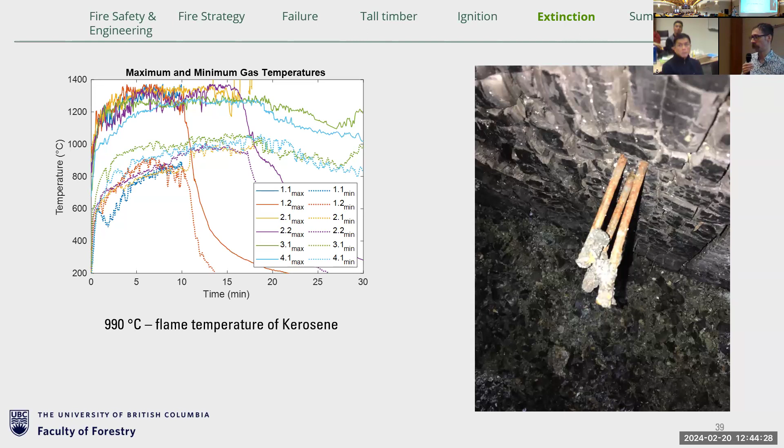Okay, fire retardants are often mentioned when it comes to making timber safer. They can certainly work, but we need to think, okay, what are they actually achieving? Are they helping us slow the spread of fire? Are they helping us increase the fire resistance? Are they possibly reducing the load-bearing capacity? They increase costs - obviously having to run timber through a treatment process is more expensive than just using the raw timber.

Once I put fire retardants in my timber, I increase the embodied carbon or the embodied energy on it, and also make it harder to send it to landfill later.

This was an interesting study that came out last year from researchers in the UK. They took pine, fire retardant treated pine, and fire retardant coated pine, and checked it at different stages of a fire. They saw that both the coated and the fire retardant worked to limit the fire spread and make sure the timber contributes less to the fire, or at a later stage. But when they had a fire that's well developed, the toxicity released from that fire retardant timber, especially the treated one, was much higher than the raw timber or the coated timber.

So just because you say, okay, I'll make everything fire retardant, problem solved, you may be creating a completely different problem by creating a more toxic fire. That's another thing to consider when we weigh off different fire safety engineering measures.

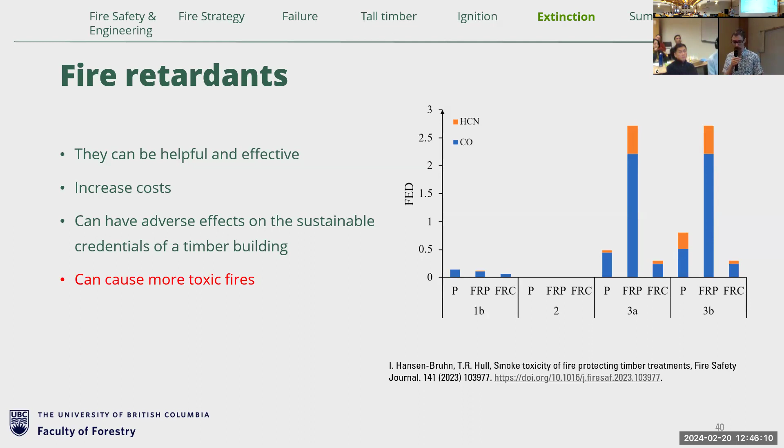Just to summarize, ignition is not really the issue when we talk about mass timber. It is an issue if we have timber lining somewhere, but from a structural fire safety perspective, ignition is not the risk. More important, we need to make sure that once we get a fire, the timber will self-extinguish. That's dependent on how much timber is exposed, what's the orientation of that timber, what's the fuel type, what's the fuel load, what's the ventilation. The timber species can have an influence, and fires have multiple stages: growth, fully developed, and decay.

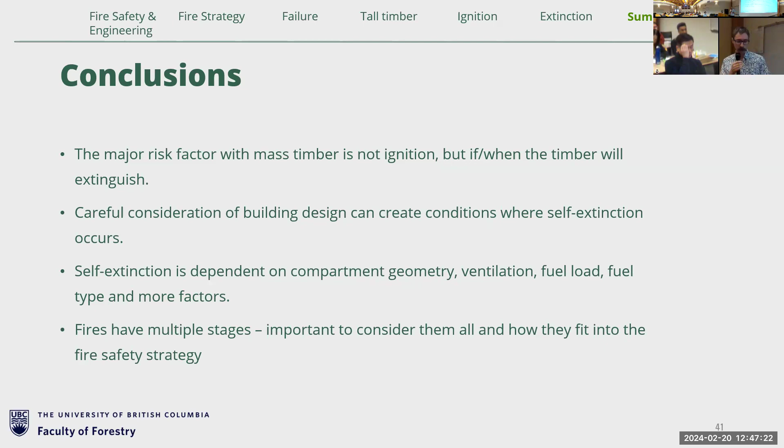We need to apply fire safety to all of these stages, and we need to make sure that we don't conflate certain fire safety features, like timber being fire resistant, or timber being ignition resistant to a 2000-degree flame, and extrapolate that to, for example, the decay phase, where we need to get the timber to self-extinguish and where we need it to keep maintaining its load-bearing capacity. I think that's it. Thank you.